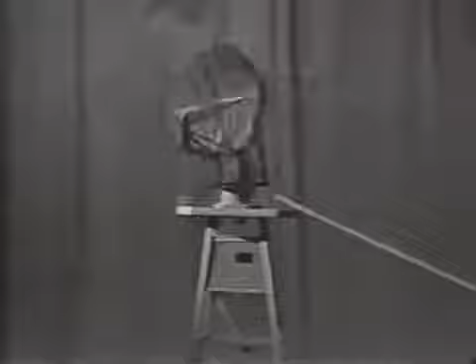I have a high-frequency transmitter and receiver in this room, and a radiating antenna at the top of this tower. Can you tell me how to transfer energy from the room to the antenna and radiate the energy into space?

Well, some of you say with a transmission line, and you're right. But we still have a small problem. It is not a straight line from the room to the antenna. Then too, the antenna is rotating.

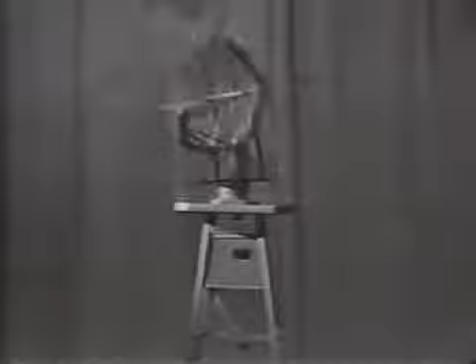Well, can you imagine what would happen if we connected a piece of waveguide from the transmitter to the antenna? You're quite right, we would have a waveguide pretzel. So let's start at the receiver transmitter unit and see what we'll need to get the energy to the antenna.

Here is a mock-up of the particular section of the system we are interested in. Now, because of the position of the RT unit, the waveguide is coming out the side in a horizontal position. The antenna is located above the RT unit, so we have to change direction and go in a vertical direction.

Well, we can do this just like a plumber would do it if he were putting plumbing in a house. We can use an elbow, or a 90-degree bend. Of course, this bend must be inserted into the waveguide and connections made on either end of it. So we will use choke joints to make the connections.

Now we come to this area of the system where the stationary waveguide must be connected to a rotating section on the antenna platform. This connection is made with a rotating joint, which is enclosed in this housing.

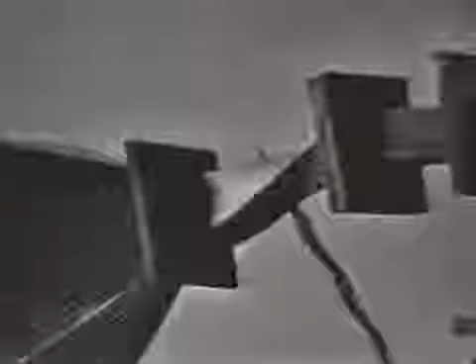Just before we get to the end of our system, we have to change the polarization of the energy to properly feed the antenna. So we put a 90-degree twist in the waveguide.

Now, at the end of the line, we have to get the energy out of the waveguide and send it out into space without losing too much power. And to do this, we use a feed horn.

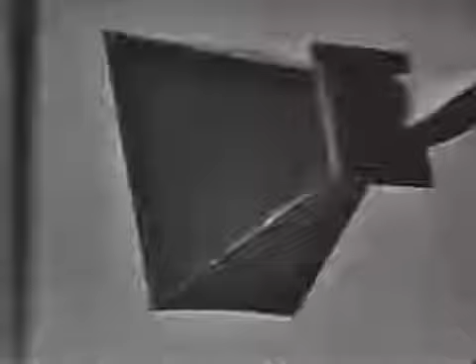And finally, if we had to work on the system while it was in operation and we didn't want to radiate any energy, we could connect a dummy load, such as this, to the antenna or the transmitter to absorb the energy rather than radiate it.

Now, upon graduation from this school, you will not be expected to be able to design a system such as this, but you may be required to work on one similar to it. So it's important that you at least be familiar with the physical construction and the electrical operation of the different components of the system.

And during this lesson, we will discuss the choke joint, the rotating joint, the feed horn, and the dummy load. We will also identify E and H bends in a waveguide and see what happens when the waveguide is improperly bent.

Well, our problems have been laid out for us, so let's solve them one at a time, starting back down here at the RT unit with the bend in the waveguide.

Now, we will discuss two types of bends, the gradual E bend and the gradual H bend. Here's a picture of the E bend. Well, can you imagine why it is called an E bend?

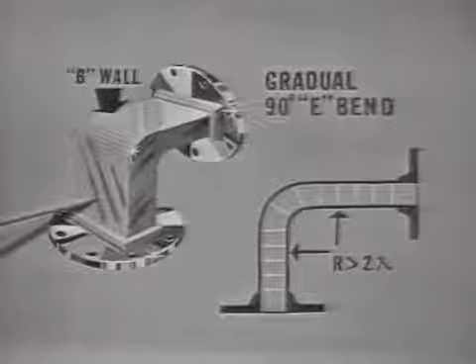Well, as you know, lines of force in the E field within a waveguide travel from B wall to B wall. So when the B wall is bent in this manner, the E field will receive maximum distortion. Now, since the E field is distorted more than the H field, we call this bend the gradual 90-degree E bend.

You will notice here is a picture of the E field lines of force within this section of the E bend. For explanation purposes, we are not showing the complete number of lines of force within the section. Actually, there will be many more lines of force within both the bended section and these sections.

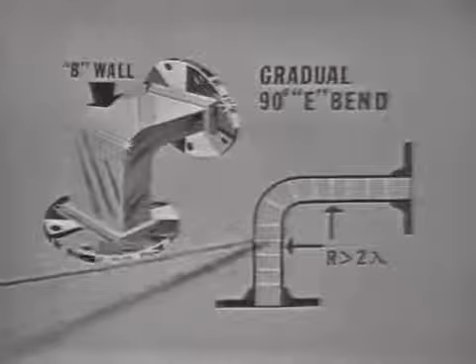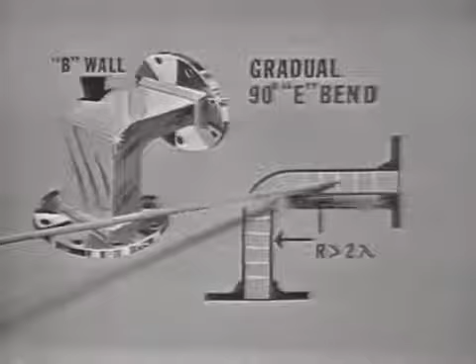Now, using this diagram, let's consider how the E field is affected when the B wall is bent. You will notice that here and here, the E lines of force are normal. But right here, where they round the corner, they are stretched farther apart, or distorted.

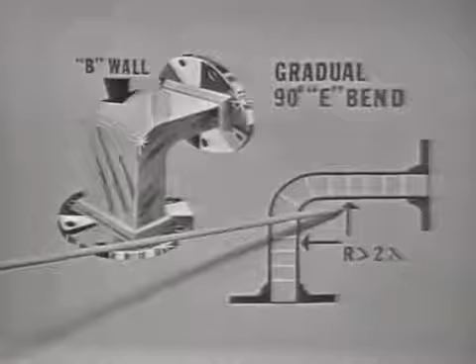Now, we mentioned that this was a gradual bend. By gradual, we mean the electrical distance from the beginning of the bend to the end of the bend must be at least 2 complete wavelengths. This minimizes any reflections and losses. Remember that any time a waveguide is bent, the radius of the bend must be at least 2 complete wavelengths.

Now here is a section of waveguide with the B-wall bent.

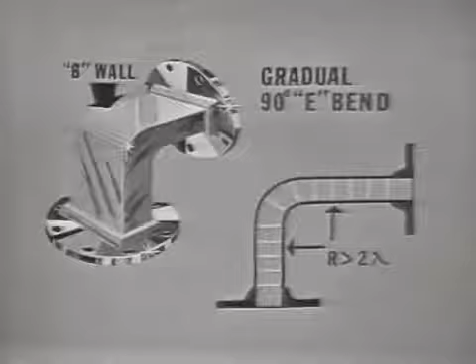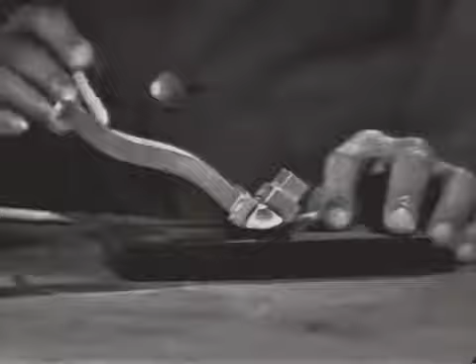You'll notice that the B-wall is the wide wall. Notice also that the bend is gradual. Remember that the radius of the bend must be at least 2 complete wavelengths to minimize reflections and prevent losses.

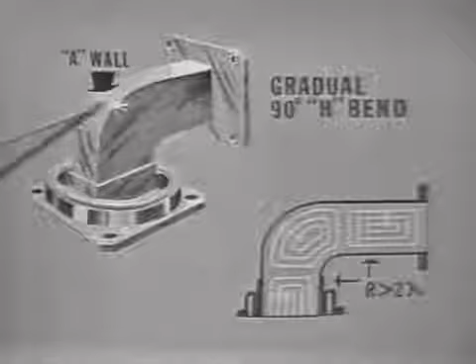Another type of bend is the H-bend. The H-field lines of force travel between the A-walls of a waveguide. So when the A-wall is bent, the H-field will receive maximum distortion. And for this reason, we call this bend the gradual 90-degree H-bend.

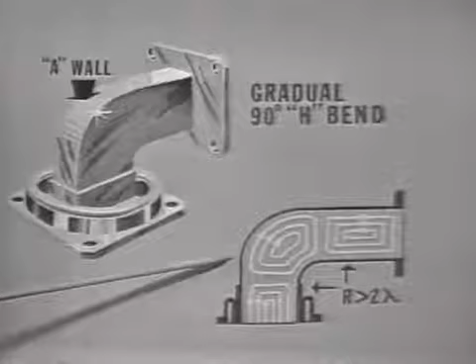Here's a picture of the H-field lines of force within this section of the H-bend. Again, for purposes of explanation, we're not showing the complete number of H-field lines of force. Let's consider what happens to the H-field lines of force when the A-wall is bent.

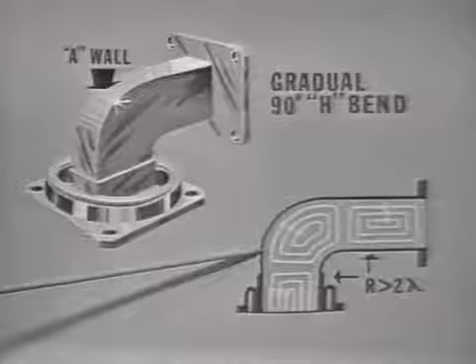Here and here, the field is normal. But right here at the bend, you'll notice that the H-field lines of force are stretched out or distorted. Again, the radius of the bend must be greater than 2 complete full wavelengths to minimize losses due to reflections.

However, the bends must be made gradually. If they are too sharp, they will cause reflections and losses. A bend may be greater or less than 90 degrees, depending upon the requirements of the individual system.

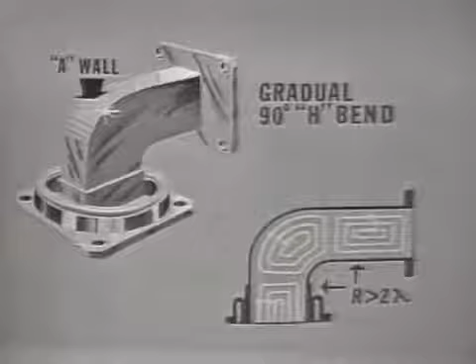Also, any dents in the walls of the waveguide will also cause reflections and losses. So when you get out into the field and start to handle a waveguide, be careful with it and try not to dent or bend it in any way.

Here is a section of waveguide with the A-wall bent. You'll notice that the A-wall is this wide wall. Again, the bend must be made gradual. The radius of the bend must be at least 2 complete full wavelengths to minimize reflections and prevent losses.

Let's now complete item number 1C in the TVI guide. This item reads: an E or H bend in a waveguide may be more or less than 90 degrees, but the radius of the bend must be at least 2 wavelengths for each 90 degrees. You fill in the numeral 2 in the blank space.

Now, this bend which we have inserted into the system must be connected both physically and electrically to the rest of the system. And we said we use a choke joint to make the connections.

This choke joint gets its name from a component you're already familiar with, the RF choke. You'll recall that the RF choke is used in electronic circuits to choke off the RF energy and keep it in the part of the circuit where it belongs.

The choke joint accomplishes the same thing for the waveguide. It prevents the energy from escaping from the waveguide where the physical connections are made.

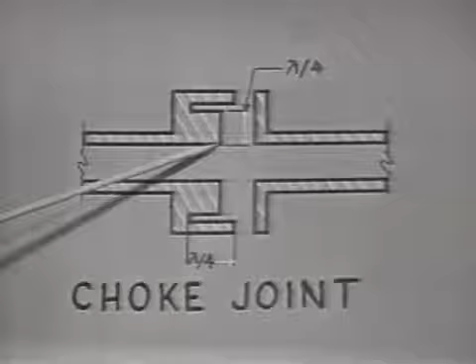An open. It will reflect an open at the top of the perpendicular slot. And what will this open in turn reflect, 1/4 wavelength away, or here, at the wall of the waveguide? A short. So here where the two sections meet, we have a point of low impedance.

And the one waveguide wall is effectively shorted to the wall of the other section, electrically, even though the walls may or may not touch physically. The physical construction looks like this.

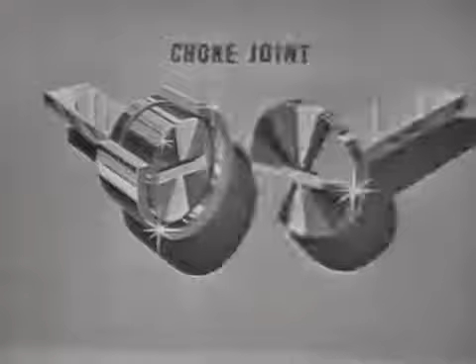You'll notice here is the flat flange on this section, and here is the slotted section. This has been cut away to show the slot. Here is the parallel slot, which is 1/4 wavelength deep, and here is the perpendicular slot, which is 1/4 wavelength from the wall of the waveguide.

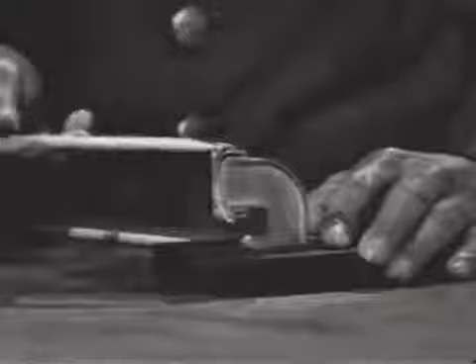Now here we have a cutaway of an actual choke joint. You will notice that here is the perpendicular slot, and here are the parallel slots.

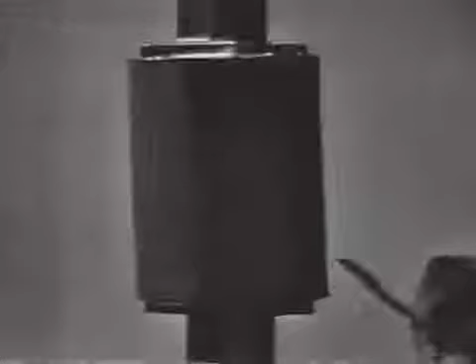Well, so far we have turned the corner and are headed in a vertical direction. Now we come to the point where we must make a transition from the stationary waveguide to the rotating waveguide on the antenna platform. This housing surrounds the rotating choke joint to hold it steady.

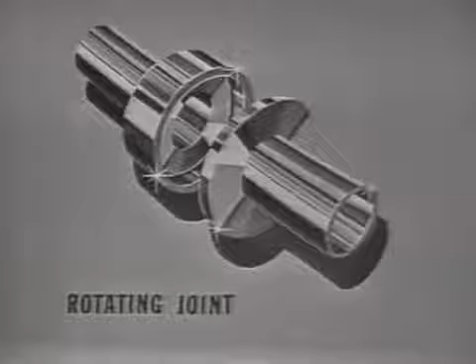If we were to take a peek inside of the housing, we would see something like this. Does it look familiar? It should, because its construction is very similar to that of the fixed choke joint. The only difference is that in order for one section to rotate, and the other to remain stationary without disturbing the electrical characteristics in the waveguide, the waveguides themselves must be circular.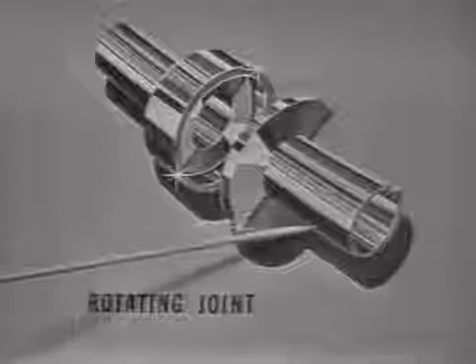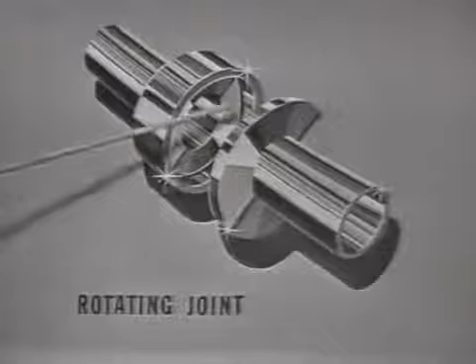Naturally, the transition from rectangular to circular waveguide must be made at the ends of both sections. Now, electrically, this rotating joint operates the same as the fixed choke joint. You will notice that here is the perpendicular slot, and here is the parallel slot. Both are still 1/4 wavelength long, and the standing waves in the slots give us the proper electrical characteristics to keep the two sections connected electrically, yet they may or may not touch physically.

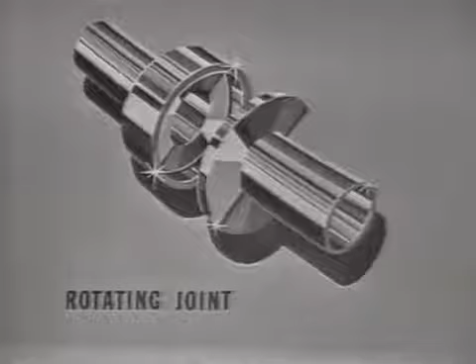Now, this purpose of the rotating joint is stated under item 3 of your TVI guide. Let's complete this item. The rotating joint enables us to connect a rotating section of the waveguide to a stationary section electrically, yet keep them separated physically. Electrically goes in the first blank, physically in the second blank.

You will also note that the electrical characteristics of the rotating joint are identical to those of the fixed choke joint.

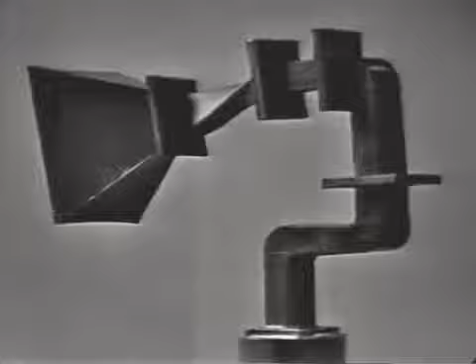Now, because of the constant rotation of the antenna, there will be movement and vibrations present in this part of the system. Prolonged vibration will have an adverse effect on anything that is held rigid. So to overcome the effects of vibration, we use sections of flexible waveguide in the system.

Here is a section of flexible waveguide. You will notice that it can be bent or twisted in any desired direction.

Let's consider what this section of flexible waveguide is constructed of. You will notice that it consists of a spiral-wound ribbon of brass. The assembly is like a spiral spring in that it can be bent or twisted into any desired shape.

You will notice that the outside of the section is covered with rubber. This gives the section flexibility and at the same time makes it both airtight and watertight. RF energy travels through this flexible waveguide just exactly the same way as it does through the rigid waveguide.

Well, at this point in our system, we come to a few more bends to physically situate the waveguide properly with respect to the antenna reflector. However, for the particular system we are discussing, the energy is not correctly polarized to give us the desired radiation pattern. We can change the polarization of the waveguide by putting a 90-degree twist in it.

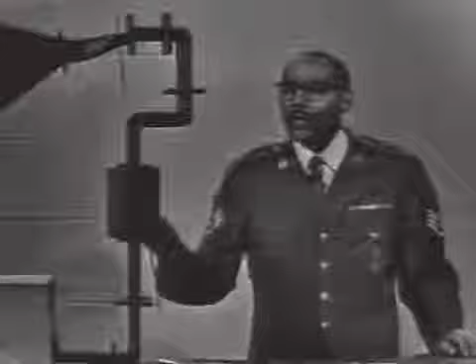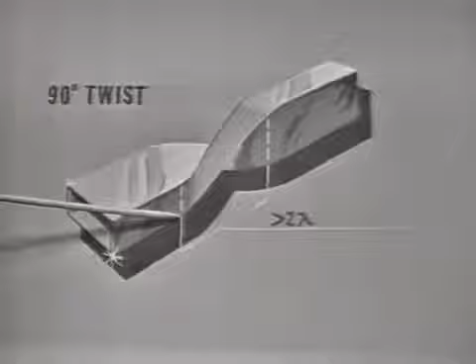Here is a picture of the 90-degree twist. You'll notice that the twist must be made gradual. This is to minimize reflections and losses. The electrical length from the start to the finish of the twist must be at least 2 complete wavelengths.

Now here's a section of waveguide with a 90-degree twist. Notice that the twist is made gradual. Remember that the electrical distance from the start to the finish of the twist must be at least 2 complete full wavelengths.

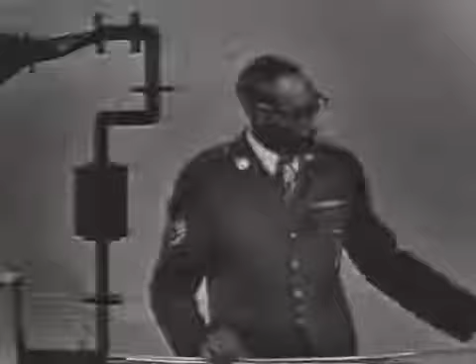Now we are at the point where the RF energy is to leave the waveguide and be sent into free space. I'm sure you must realize that the characteristic impedance of the waveguide is low as compared to the impedance of space, which is several hundred ohms. In order to get the maximum transfer of power from the waveguide to space, we must match the impedance, and our impedance matching device is called a feed horn.

A feed horn is actually a tapered section of waveguide, and it matches the characteristic impedance of the waveguide to the impedance of free space by making the impedance change gradual rather than abrupt. For instance, here's how the E-lines are affected.

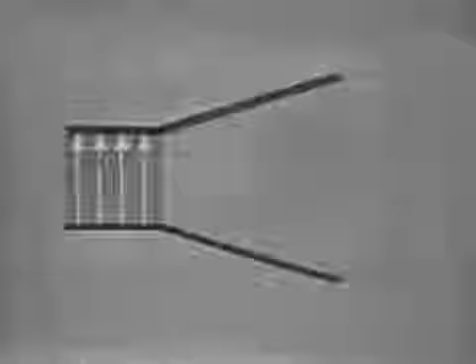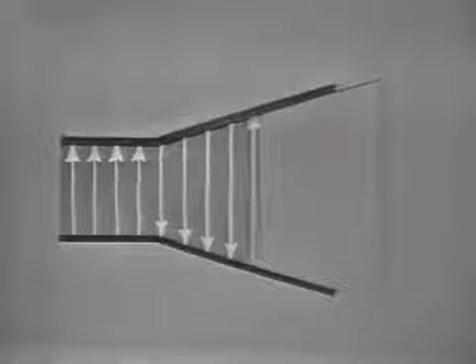As the E-lines travel down the feed horn, they get longer and longer as the impedance increases. By making the impedance change gradual, we have minimized reflections and losses. Of course, the angle of taper of the feed horn will depend upon the frequency of operation of the system and upon the antenna's physical requirements.

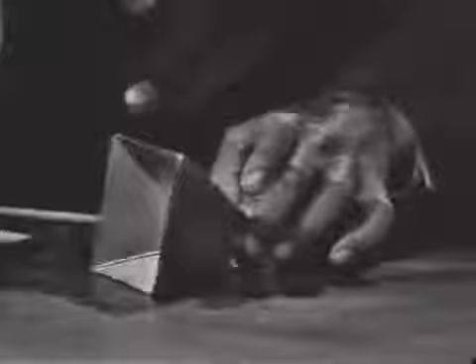Now here is an actual feed horn. You'll notice it's nothing more than a tapered section of waveguide. On this end is where the choke joint connects to the waveguide. And again, this is the tapered section that gradually changes the impedance from that of the waveguide to that of free space.

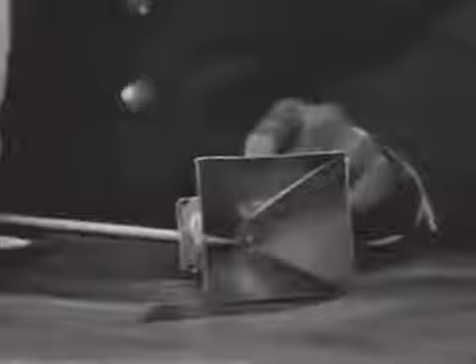Now, for our final objective, let's go way back down to the RT unit. Let's assume that for some reason we wanted to work on the RT unit under normal operating conditions, but for one reason or another we did not want the antenna to radiate any energy. How can we operate the set without sending out any energy? Well, we could put some device in place of the waveguide that will absorb rather than send the energy to the antenna.

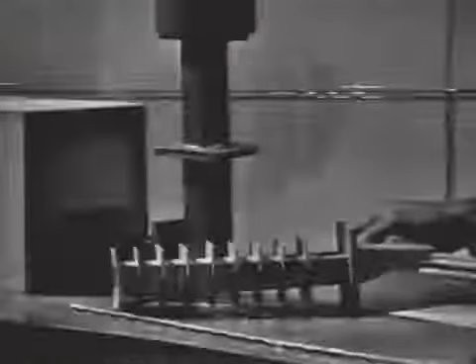The device we use to do this is called the dummy load. In order for the dummy load to absorb and dissipate all of the energy we feed into it, it must be highly resistive. They are commonly constructed by making the walls of the waveguide from a power-absorbing material such as powdered graphite and a cement binder.

This section of the dummy load is inserted right into the waveguide to match the impedance of the waveguide to that of the dummy load. Now, because the dummy load is so highly resistive, all of the energy entering it will be dissipated in the form of heat. These wafer sections you see here are the cooling fins to give us more cooling surface area. Even with all these cooling fins, the dummy load can still become very warm when the set is operating.

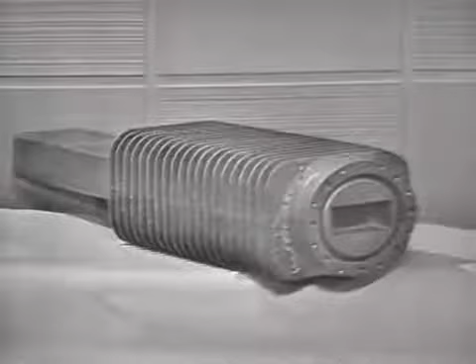The actual dummy load looks like this. Here is the part that's used to match the impedance of the waveguide to that of the dummy load. And here are the cooling fins.

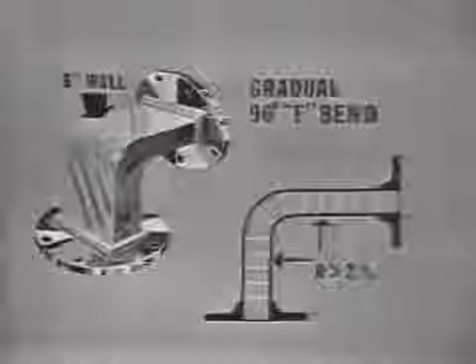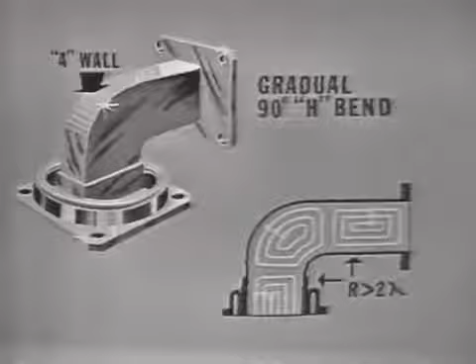Now, the first point we discussed in this lesson was the bends in the waveguide. We learned that when the B wall was bent, we called it an E bend, because the E field received maximum distortion. This is the gradual 90-degree E bend. When the A wall was bent, we called it an H bend. In this case, the H field lines of force will receive maximum distortion. Remember that the radius of the bend must be at least 2 complete wavelengths to minimize reflections and losses.

We also saw that it was possible to twist a waveguide to change the polarity of the energy. But here too the twist must cover at least 2 complete wavelengths to minimize reflections.

Now, in such cases as rotating antennas or any place where motion or vibration are factors, flexible sections of waveguide are used to absorb the vibrations. Flexible waveguide is used where freedom of motion is essential.

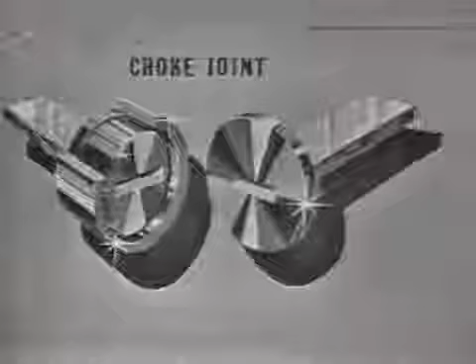Now, all of the sections of the waveguide must be connected together to make a complete system, and we cannot afford to lose any energy at these connections. So we use a choke joint to make the connections. The choke joint, through the use of standing waves in the slots, produces points of low impedance or electrical shorts at the wall of the waveguide.

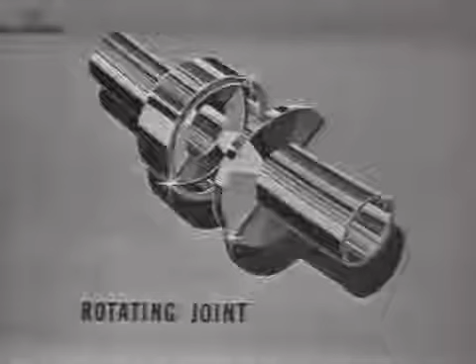This type of connection is electrical but not necessarily physical, as in the case of the rotating joint. In the rotating joint, where we cannot have a physical connection, the 2 sections are physically separated and are rigidly supported so that one section is free to rotate and the other is stationary. This joint makes an electrical connection between the 2 sections of the waveguide.

Now, to match the impedance of the waveguide to the impedance of free space, we use a tapered section of waveguide known as the feed horn. By making the impedance change gradual rather than abrupt, we can obtain minimum loss in the transfer of energy from the waveguide to space. Finally, we discussed the device called the dummy load.

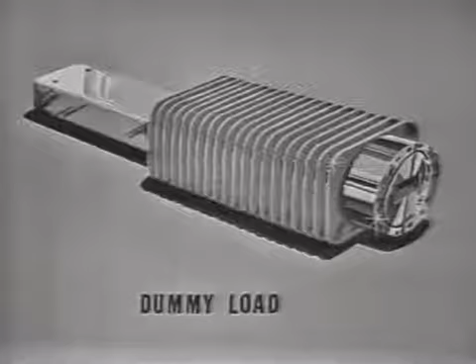Remember that this is a highly resistive component that can be inserted into the waveguide to absorb and dissipate RF energy rather than send it out into space. A dummy load is used anytime it's necessary to operate the set without radiating any energy.